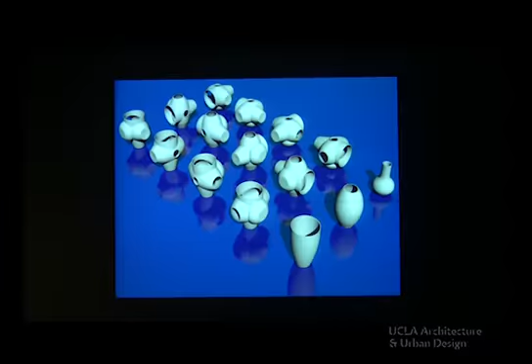The first project I'll show is a vase we designed. We took three archetypes of vases where you can put different bouquets in, and we merged them together, with this as a result. So it's one object made from three very cheap vases—you can buy them for $5 at the department store, and when you merge them together, they actually get ten times more expensive. They're very difficult to make, but very beautiful, we think.

I'll show a lot of projects at a very high pace—if you don't understand something, feel free to interrupt me. Also, I speak a little funny English sometimes, because we speak English in the office, but with all mainland European people, so non-native speakers, and sometimes we make up words that don't exist but we all understand. So if I use one of those words, just ask me and I'll try to explain.

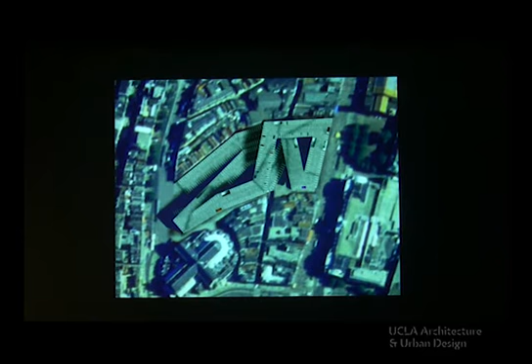This is an interesting project—the final project of Pieter and Kamiel at university. It's a shopping mall and office building where you can drive and park on top, and this is in the middle of the center of Amsterdam.

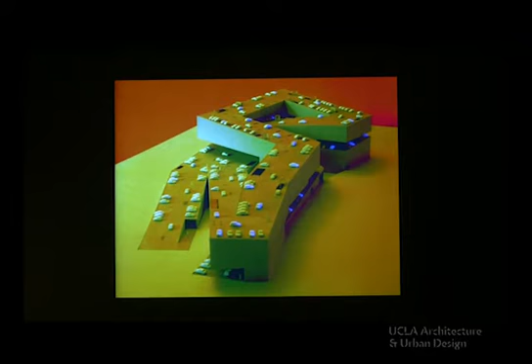So it's a very interesting sculpture. It's sort of a 1 kilometer long stripe that is folded up in the city center of Amsterdam.

Later in our career, we got the assignment to make 501 family houses in a new area close to Utrecht, and we tried to use this idea again of driving and parking on top of the house. A typical extension in Holland for family housing is completely based on the car: you have a little street, you park on each side, a little front garden, then row housing, and in the back a private garden.

We were basically asked to make this typology. We thought, you see the children are playing in the street and there's practically no room for them, so we thought with the same density we could make a much better plan.

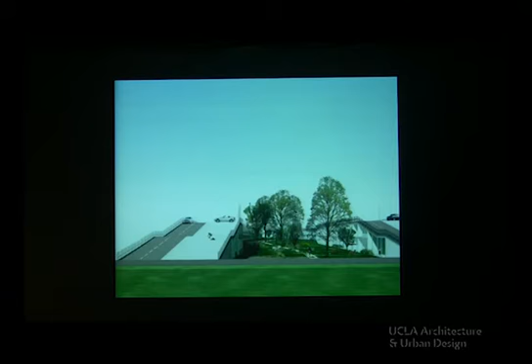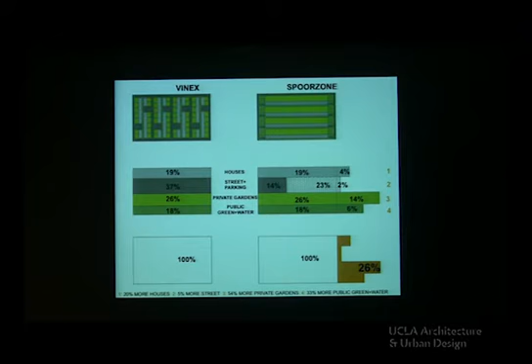So we said, why not park on top of the roof? You can still park on top of your own house, but you create a completely car-free environment to live and play. We made calculations with the clients: left is the regular plan, right is our plan. We create 4% more houses to pay for the additional cost of parking on top, and we still save 26% of space that can be completely green, making green row housing with private gardens and parks between the houses.

It was almost executed because it was completely viable, but then the housing crisis in Holland came and the client didn't dare to build it anymore. We were hoping that the kids from these houses, when asked in kindergarten to draw their house, would finally draw something other than the typical house.

One of our most important projects is the Groninger Forum. It's a museum, library, conference room, restaurant, bar—actually what we call the living room of the city of Groningen. Groningen is all the way in the north of Holland, one of the most important cities of the northern part of the Netherlands.

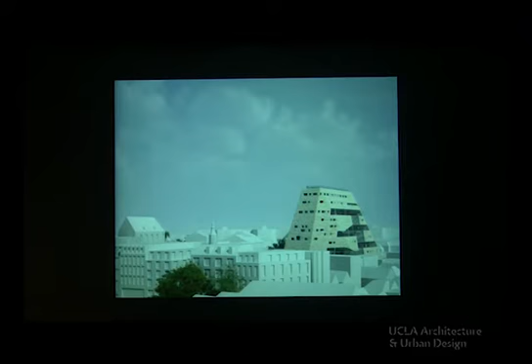It's in the historical center of Groningen, right on the Grote Markt, and it's much higher than most buildings around it. To indicate the importance of the location, the Grote Markt is actually on the Dutch Monopoly map, so that means it's an important location.

This is the model we built. I just mentioned it to Neil and Mary—the general public got to vote which of the proposals could win, and we were given a wooden model by the city in which we could implement our design. As the only competitors, we built our model in wood too, to make it fit into the surroundings, while all other architects came up with a white model.

There's Erik van Egeraat and Wiel Arets, quite famous Dutch architects, our competitors. Zaha Hadid was also competing. So we beat them all—I'm still happy about that, by the way.

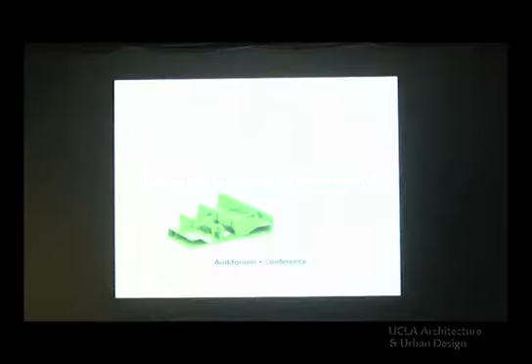The core of the building's program is a library, with a lot of art film houses, a museum, and a conference center around it. We thought the whole building should be like a physical Wikipedia. This is all the programs that are around the atrium.

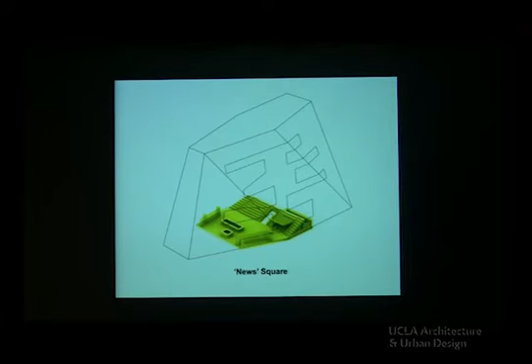This is the auditorium, we have a museum, we have a cinema, and then there's a square on the ground floor. The open spaces are all library basically, but they're all called squares with a certain theme: the culture and youth square, the history square, the cinema square—all squares together make up the whole library, connecting all the other programs.

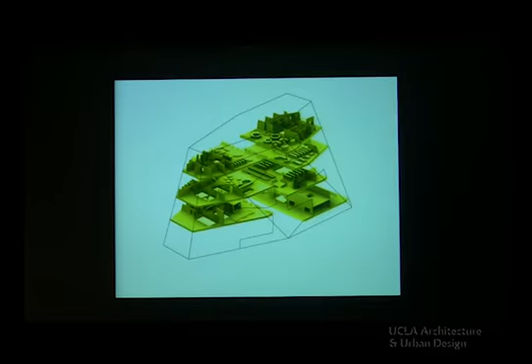This is the model that we built at the time. It looks extremely complex if you take off the facade, but the geometry is quite complex while the building itself is actually quite simple.

So the atrium, we were asked to make a program that would connect all the different programs of the building, but there was very little space on the site, so we had to invent a new way to connect those things that you would normally do on a flat surface. We made the atrium, and we actually made this atrium the image of the building, connecting part of the space that would connect all the programs.

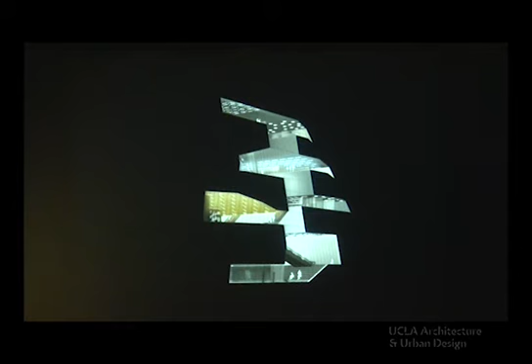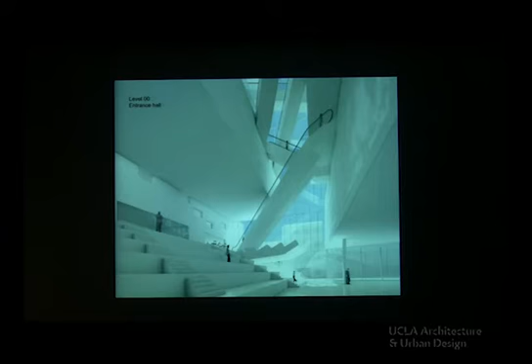At night the atrium would serve as a logo for the building. Here you see this atrium. So all these open spaces are library, so everybody can walk in without a ticket and enjoy this space. And then from there you go to the cinema or to the museum, which is actually ticketed.

Here we won the competition, so we could keep everything white again. So this is the plot. This is the maximum extruded plot, the maximum envelope.

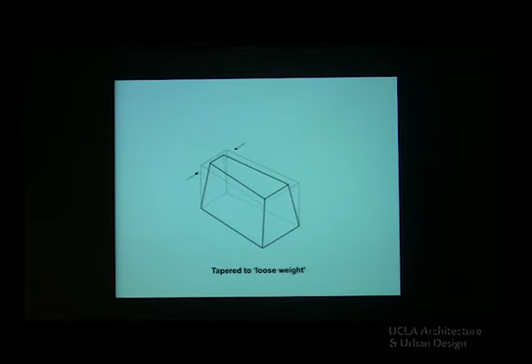We taper it to the top to bring light to the surroundings, and we slice off some parts to create entrances. We slice off some more to bring even more light in. We did some sun studies, and there are small houses all around it, so we didn't want to put them in shadow. And then you come up with this building.

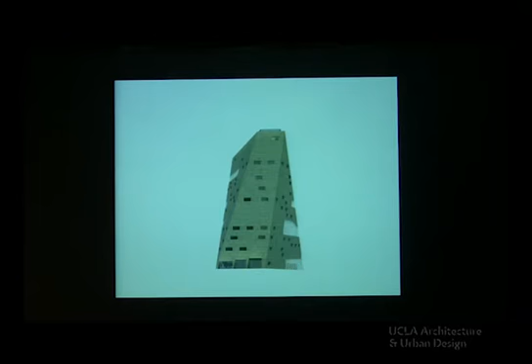And actually, from every side, the building looks completely different. So it can look like a very huge building, or it can look like a small, very slender tower, depending on where you see it.

And of course, we had to make calculations to fit in the rules. The maximum height of the building was 45 meters, and the average height, per the zoning law, had to be 33 meters. Our building's total height is completely 45 meters, the maximum height. But we cut off pieces from the original extrusion, calculated them, and found that the average height was actually 31.4 meters. Well, we got away with it.

This is how you see it later from the photomontage. Last week the contractor was chosen, so in the next couple of months we're going to start building, and the building is going to be finished in 2017.

But what didn't show in the presentation is that it has a very big basement with a parking lot going down 20 meters, which is a big job in Holland because there's water everywhere. So that alone, the basement, is going to take 2 years to build.

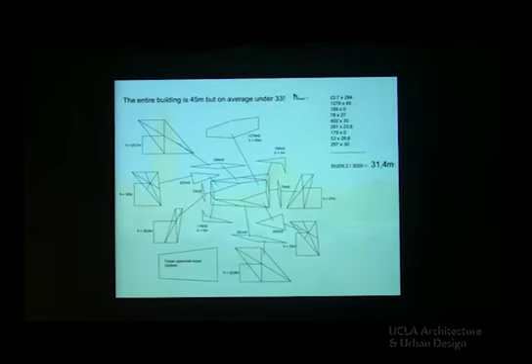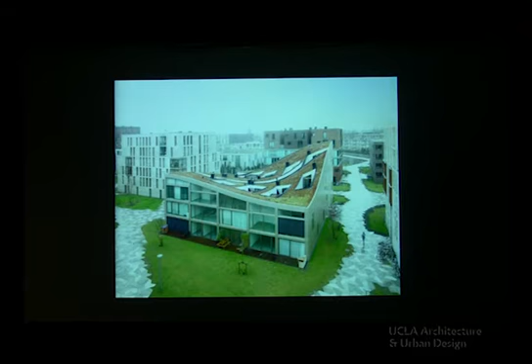So the next project is Funen. That's the rewarded housing block we did in Amsterdam. We designed it in 1999. It was one of our first housing projects, and it got executed in 2010, a year ago now. And this is the end result. Location is in Amsterdam.

This is the old harbor that is completely converted into a housing area, a little industrial zone now turned into housing. Right here is the location of the building. There's a master plan by Architecten Cie., who makes what they call the hidden lights, little villas in green with a big wall around them to block the noise of the trains around it.

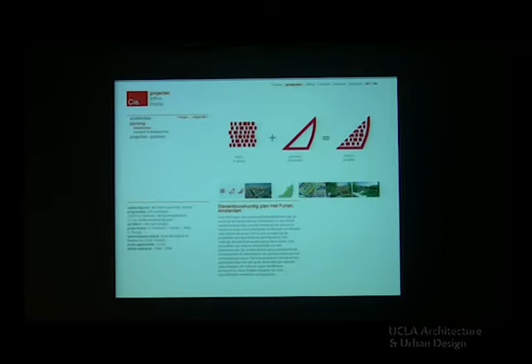The given brief was that we had to make 10 dwellings with this profile, so 2.5 stories, or 2 stories plus a half story, and make a roof terrace. We cut them up into 10, but we said that's not such an exciting volume, so we made 2.5 floors completely flat, and then started moving it around.

So we chop it up into 10, and we actually push the roof down where the next-door blocks are close, and pull up the roof where there's space in the urban plan, because it's quite a narrow and dense urban plan.

And we have this inner street where the houses have their entrances. We switched it from an open space to another open space. So all houses have exactly the same volume, but they all have completely different bay widths and different floor plans.

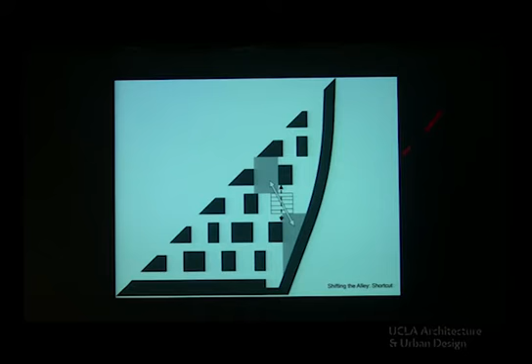And it is the end result of the inner model. You see here that the inner street is connecting 2 open spaces, and the shape of the roof is bringing light into the urban plan.

We found out later that making 10 different floor plans in a little block is very labor intensive, especially because halfway through all the building code changed, so we had to redo the whole thing again. But they were quite exciting houses. They were actually built during the crisis, but still all sold because they're quite unique housing.

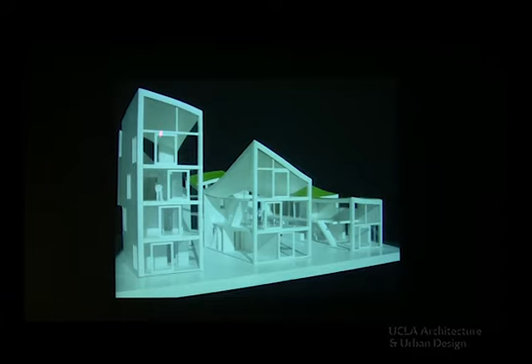Here you have the model. This is one house, this one missing, and another house to show you. So there are different floor plans, and they all have a patio in the roof.

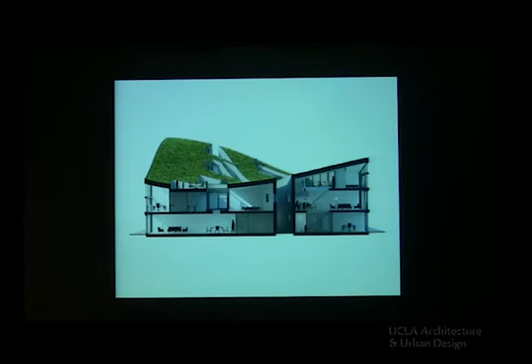We slice it up, so here you see this patio bringing light into the deeper houses, in deep dwellings. So the change from very deep and low into very high and narrow. Here you see a picture of the inner street connecting 2 open spaces. This is one of the patios.

This is our office visiting the building when it was finished. Luckily, it has a very poor interior when we delivered it, but all people hired an interior architect to make very beautiful interiors. It's just the standard of the way we finish housing in Holland. It's very poor as a standard, and everybody is making their own nice house out of it later.

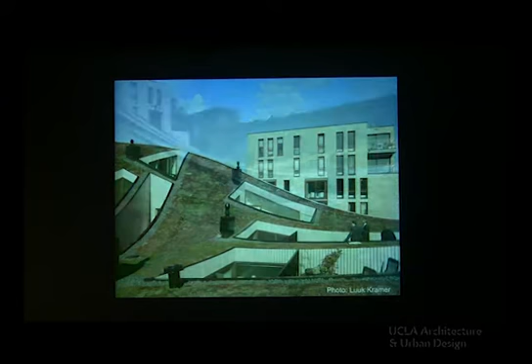Here you see the patio in the middle of the living room. And the roof, which is quite unique in Holland because everything is flat, and this almost feels like you're in a little mountain area when you're in the patio on the roof. Happy owner. The roof is getting more and more green, and sometimes very white.

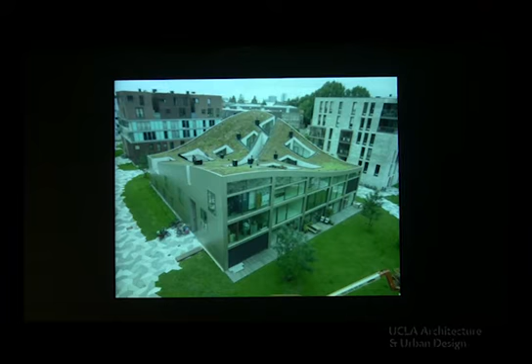This is actually a very unique area because it's completely car free. So you park under the big building next door, and then you walk to your house. You see everybody has a bike. And the children just run outside without being afraid of cars. It's a very nice living environment. Apart from the building, that's a very important quality of living here.

Next project is social housing in Groningen. This is the project, another competition that we won. It's senior citizen housing with kindergarten downstairs. So we stack up different housing types, and we use the balconies to sort of smooth out the volume, because it's built in a very cheap way.

This is the area where it's in. This is considered a very unpopular kind of housing typology. This is the gallery flat, and in a way we do the same, except it's not a gallery but a balcony. But we try to show that this rigidness of the gallery, when you adjust it a little bit, could actually be a very attractive type.

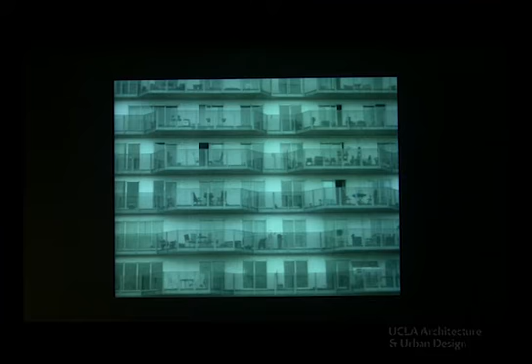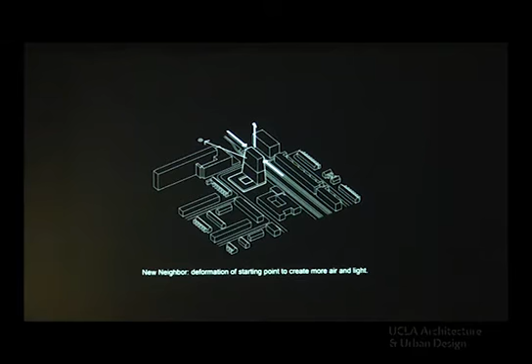So this is the original volume given by the urbanist. It's really not working. So we actually changed the basic volume. We made it more slender and made the extension lower, and again tapered it to the top to bring in light for the surroundings. You see there are very small houses next to it, very small one-family houses, so we didn't want to obstruct the light coming down.

So this is actually very luxurious social housing, for older people that have like a big 3-room apartment. It's also especially catered to disabled people. So everybody has a big balcony and a sort of smaller balcony just for the window washing. But it's wrapped all around.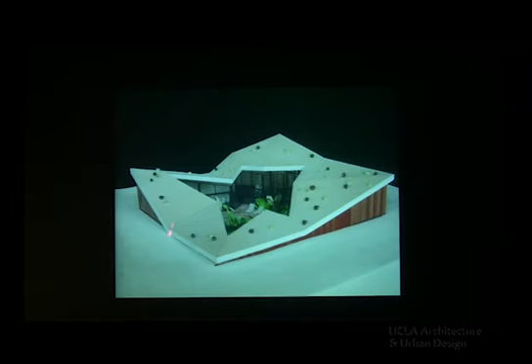So we wanted to create this patio house, but here we were not allowed to build, so we thought we'd just push the house underground there. This is what would have been the shed, so we were allowed to build 10% outside the pitch, and this is just where it's allowed to build. So in the end this is the shape - this part is considered underground, this is underground, and this is the 10%.

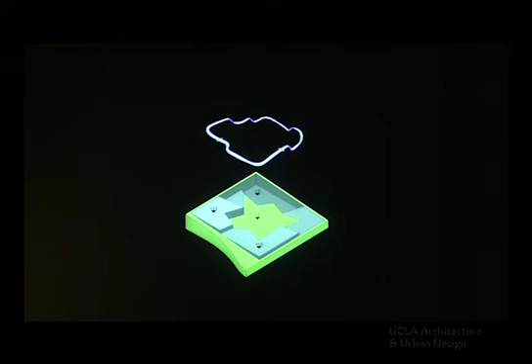So actually, forced by this zoning, we created a very interesting patio type that is not a flat patio, but one that is changing levels, which has the big advantage that there's a patio, but you still have a view over your own house looking outside to the mountains.

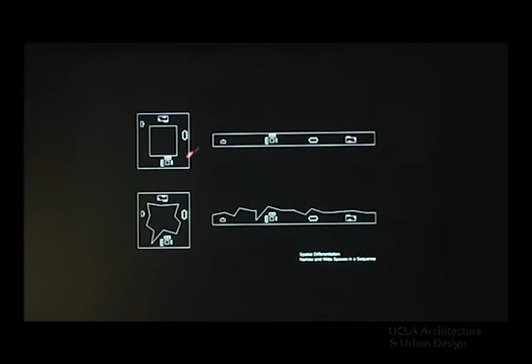These are the floor plans. You see the shape is not straight, so you start with this patio, but then you find out that different functions, like the living room, are bigger in size than the bathroom and the kitchen and the bedrooms, so the size of the patio actually follows the function that is behind it.

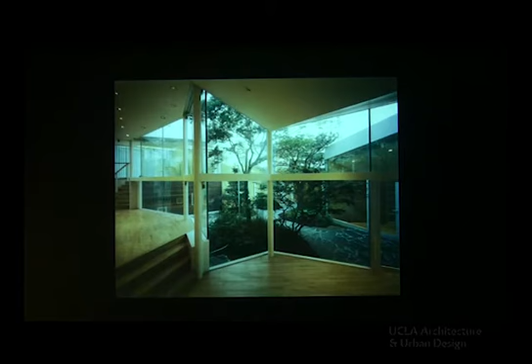This is the view from the front door, and this is the patio, glass inside. So you see the different levels. And here you get to the living room that is actually looking out over the roof in the back.

It's the front door we designed, but we sent them a computer file for them to automatically produce this. But in the end, there was one guy with a drill who looked at the drawing very closely and made all the holes.

That was 5 years ago. Very pleasant place to live, especially in the season where these pictures were taken.

Then we have something completely different: this is a competition for a bridge, a crossing facility from Hong Kong to mainland China. My wife is from Hong Kong, so I always like to build something there, and that's why we keep doing competitions there. But we always sort of play around with the competition rules, and that's probably why we never win.

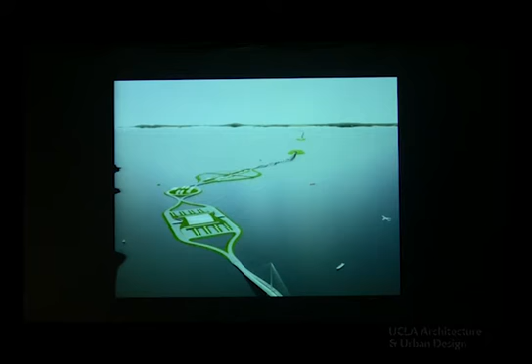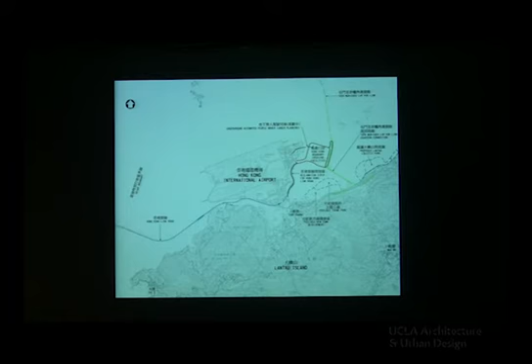So this is the final result. This is the location - the International Airport of Hong Kong, where they make a crossing for cars and buses to go to with a new bridge, the longest bridge in the world I believe, going to China. The competition was to make a nice roof over these facilities, because the layout of the facilities is so complex that the only thing an architect could do is try to make a roof on top of this floor plan.

One of the complexities is that you also change from left-hand traffic in Hong Kong to right-hand traffic in China, so that gives a lot of extra streets to organize. We thought it could be done differently and maybe more efficiently.

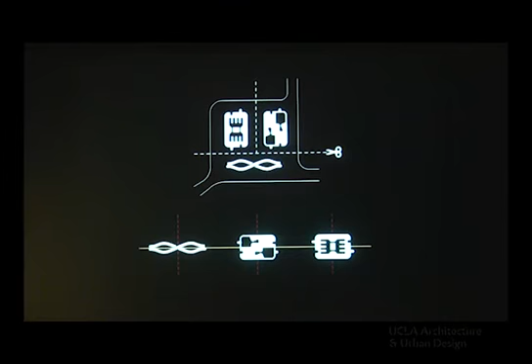So we analyzed the program. You have the cars, you have the buses, and you need to change from left to right driving. And we thought we'd just separate them into different islands. So we have one island for cars, one for buses, and one checkpoint. And we thought we should celebrate the moment of changing from left to right driving.

So we designed a special bridge where you actually start on the left side and end up on the right side, and hopefully somewhere in the middle you're aware that you changed lane. Normally there's only a little sign with a funny cross on it indicating that from then on you have to drive on the other side of the street. At least this is a bit more like a celebration.

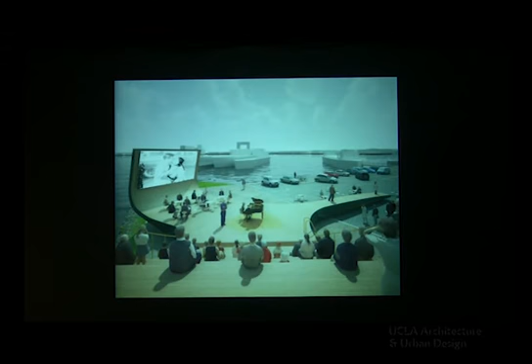This is another small project. We do very big projects too, and I'll show you a much bigger one later, but we love doing small projects because they're much faster and often less hassle, more fun.

This is a little installation for the harbor of Amsterdam. The Amsterdam harbor is not so successful because the Rotterdam harbor is very successful. That's why Amsterdam harbor is not so successful. They're trying to turn the harbor area into more of a creative industry and housing area, and since it's sort of a no-go zone, they want to build this installation to organize festivals, fashion shows, theater, and films.

So this is the location. Here you can see it because this one's not done yet. Right there is the location. It's really in the middle of the water, actually a beautiful view, with a lot of big boats going around.

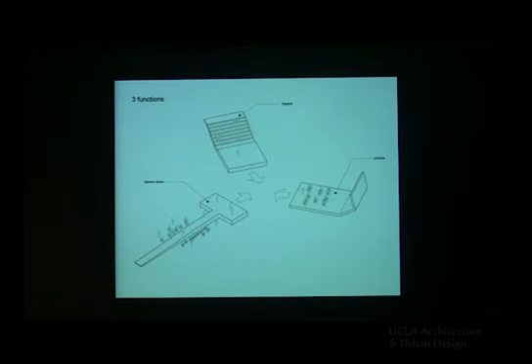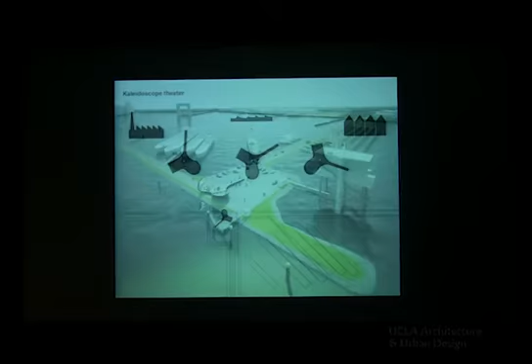So they want three programs, maybe something with theater and film. There's a lot of fashion industry already settled in the harbor area, so they want a catwalk for fashion shows. We combined them all together. But since every function is different, we thought it would be nice if it could actually turn, so it could always be in the most perfect position, with different views each time. It's somewhere in between a boat and a harbor crane.

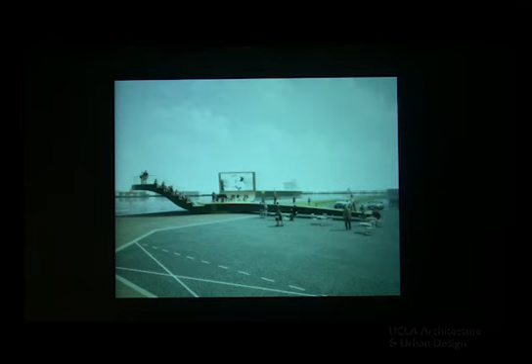And it can be turned. So we built it soon, and it appears to be very complicated. If you make the shape and just fix it, it's very simple, but as soon as you want to make it turn, all the normal contractors start to panic a little bit. But really nice.

It's actually almost like a crane platform, a big circle with very heavy wheels, all steel in this case. They have these little electric cars that have to pull it around. It's very low-tech in the way we made it. We thought it would be nice if it turned during a show, but there are a lot of rules and regulations that don't allow that. Maybe if you put it in Disneyland, it could work.

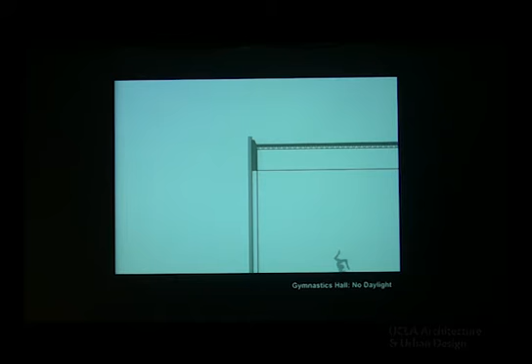And there's another project, the gym hall in Utrecht—a sports hall completely dedicated to gymnastics. The problem with most sports hall facilities is that they're very cheap and boring boxes without any expression or light. We really wanted to bring light into the sports hall, but when you do gymnastics and complicated saltos and other moves, the lighting can't change a lot.

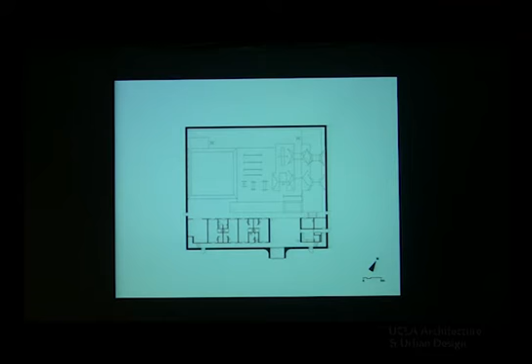So we had to come up with an idea for indirect, dim light coming in. What we did is pull the normal facade out a little bit so the light would come in via the roof. So this is the volume, and we pull out the facade a little so the light can come in. It's funny because that's really the basic and only idea behind this building—a very simple building with a big floor for gymnastics, some changing rooms, and a little stand on top of the changing rooms for the public.

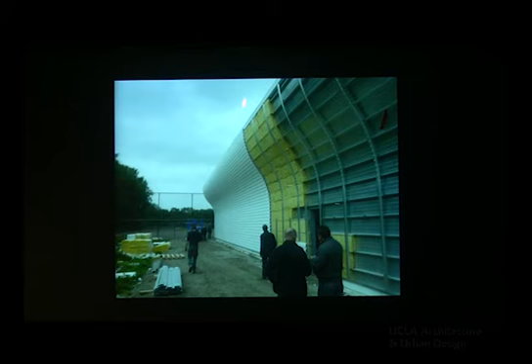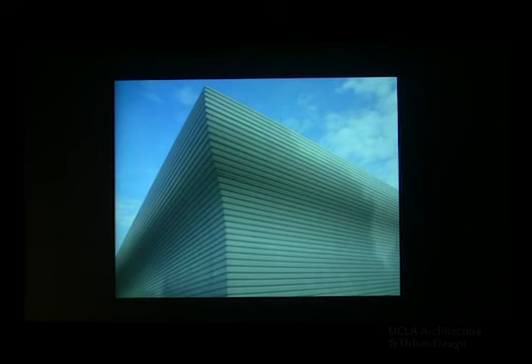This is how it's built. As you can see, it's just a standard steel shed. Only the corners are a little bit more complicated. But still, with the basic material, that's very cheap, it still makes it very nice. This is the entrance.

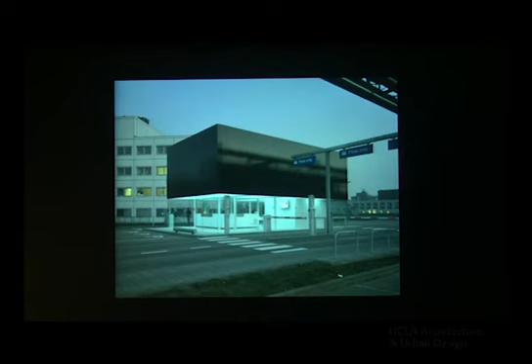Another small project that we did is the entrance building for an industrial area. On top there's a lot of computers that regulate the safety in this area, so they have to be maintained. So this is an alteration of an existing building.

And we are always very interested by reflection. In some early works we always try to make this kind of facades for buildings, and we finally had the chance to use something like that. So this is the existing building with computers and machines up there, and basically this is the location. This is the kind of work being done there, so the guy checking the safety of the area.

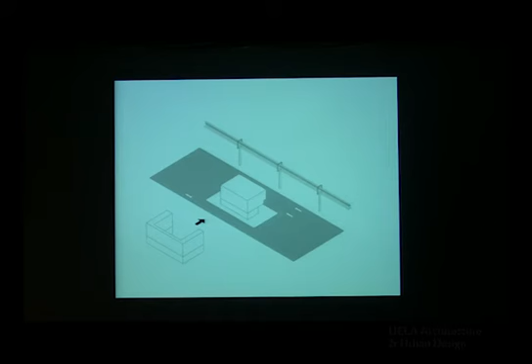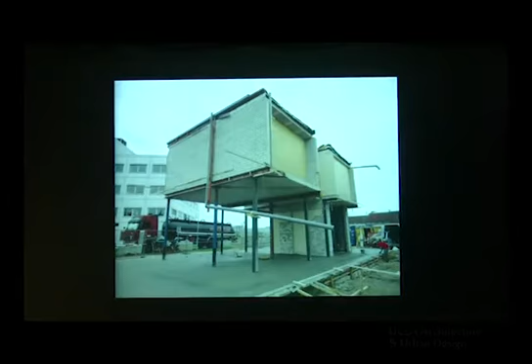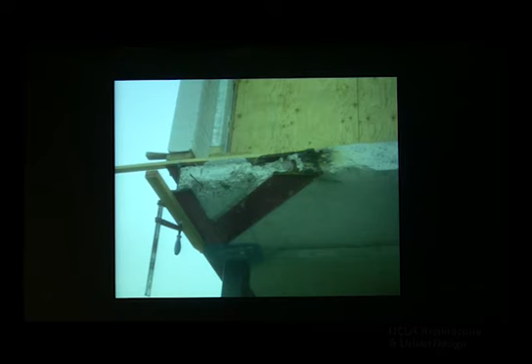So this is what was left of the building. We just made it stand up still. It's really completely chopped off the way we wanted it, and now we put the new box around it.

These are very small projects and they're nice and fast. They can be created from start to finish in about half a year or so, which is fast in architecture, and still have a nice result. Hitoshi, our project leader, very proud, showing the different phases of the building. You can also see the project text on it.

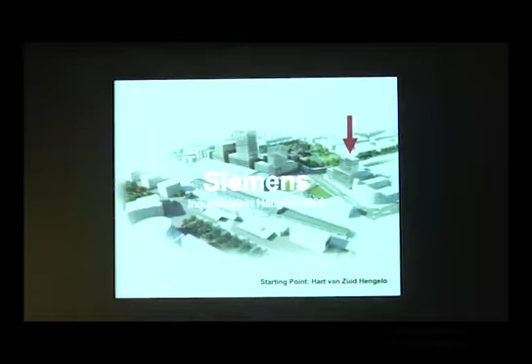Next project is an office building in Hengelo. Hengelo is in the east of the Netherlands, famous for industries that are there. Siemens has big factories there to make big machines, not consumer goods, but oil platform machinery and stuff like that.

And they're trying to make a completely new city there. This is the central station, this is the center of Hengelo, and right on the other side of the central station there is this big industrial area that is actually only big sheds. Now they try to turn it into something a little more attractive. They want to make a World Trade Center here, which I think is a little bit vain for Hengelo to think that they could have a World Trade Center. They're still trying. But Siemens would have their European or Dutch headquarters here of the machinery shops.

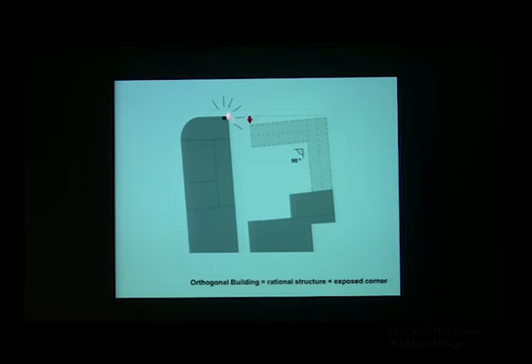So this is the floor plan. The only addition that we did is to turn it, because this is actually quite a nice industrial building, and we will show a little bit more of this building.

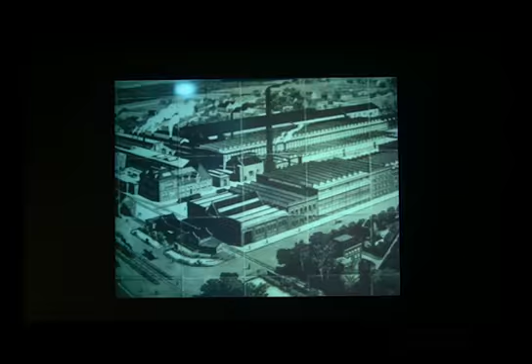So we took these sheds as our inspiration, and you see it's really very typical for this area. We thought if you want to represent this area towards the city when you come out of the central station, how could you do that? Maybe we should just put it up so you can actually see the shed roofs and turn it into a facade. That's basically what we did.

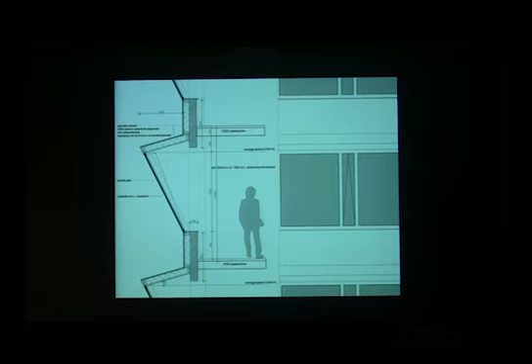So there's another advantage to making the facade slanted: it actually gives you a great view. All the buildings that need a good view looking down have this tilted glass facade. Even here on Shopping Street, people like to look down, so they make the window in a way that you can look down easily.

Next project is Kameleon. It's a very big project, actually one of the more commercial projects we do. It's in the Bijlmermeer, a post-war area where they built very big flats that soon turned into a kind of ghetto. So they're breaking most of those flats down, although they're quite beautiful with a very interesting ideology behind them. They want to break it down, and most are replaced by low-rise, one-family houses again.

But in some areas the urban designers still wanted some serious big blocks. This is one of them, and we designed it. It's the local shopping center of about 15,000 square meters with parking on top, and then apartments on top of that. They were designed to be buying apartments, but by mid-2008 the crisis was so strong that they turned into social housing. The client is a housing company, so they do both social housing and commercial housing.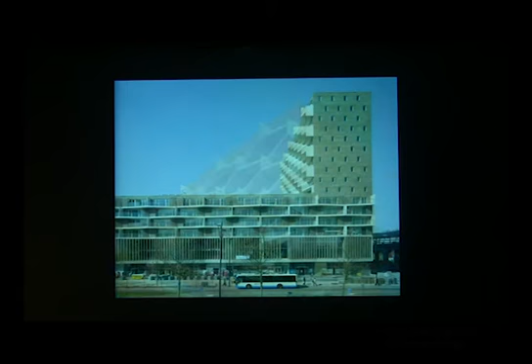This is the model we built. On one side it's a long wall, and on the other side we cut it up because there's a green yard, and this is where the sun is coming from. So to give light to the inner court, we break up the block.

This is the shopping area, and there's parking on top, which on the edge also has supermarkets at the parking level. Then we built this garden on top of the parking - it even has a water stream in it to make the houses attractive. You should mention that this area isn't very popular to live in yet, so you really have to bring in some quality to make people want to live here.

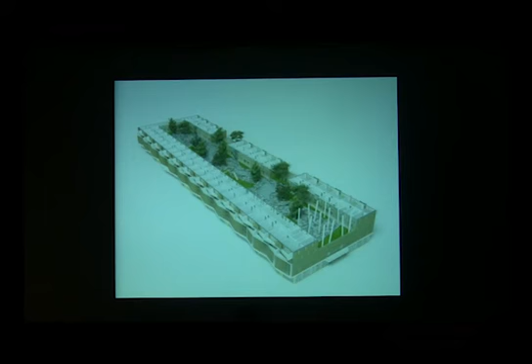So it's all simple 90 square meter apartments, about 900 square feet, basically all the same. Then the tower has some different, more luxurious typologies. You see the entry - the waterway is already there, and this will all be green with trees. You see smaller galleries broken down with some stairs to really make people feel they can access this mutual garden very easily.

Okay, this is our very first building. This is WOS 8, it's a heat transfer station. So heat from the local power plant is brought here to turn it into hot water for about 20,000 dwellings in the surrounding area. We were only asked to design a box around this machine - it's a very expensive machine with a lot of infrastructure, so we could just make a nice box going around it.

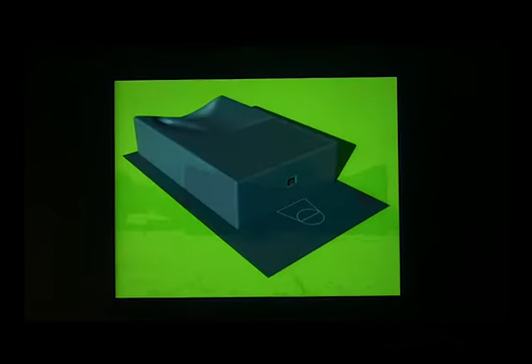We were only asked to design the skin, which we took kind of literally, because we have a completely seamless building with a polyurethane skin that is sprayed on site. There's no traditional building detail in there to keep the water out. We were only allowed to make one window.

We thought, well, then we make one window that you actually have to throw a ball against, because later it's going to be in the middle of a residential area, and these kind of buildings are always being vandalized by kids from the neighborhood. So we try to make it more attractive.

So we made this climbing wall, and actually this climbing wall spells a text in Braille. We never tell what text it is, so you have to find out yourself. Actually, the neighbor next door was making a competition, but she could not find too many blind people that could climb well enough to read the text.

It's going very fast, this is the short version of all these projects. Basketbar is one of our most famous projects, actually. It's the second project we did. It's in the Uithof, which is the University of Utrecht campus.

The urban plan is by Rem Koolhaas, and we were asked to build a bar, because for the first time there were all kinds of laboratories in the neighborhood that made it impossible to live there, but they removed the laboratories. So then there was student housing coming, and of course students need a bar, and we were asked to design it. And we were asked to design a two-story building in front of this bookshop.

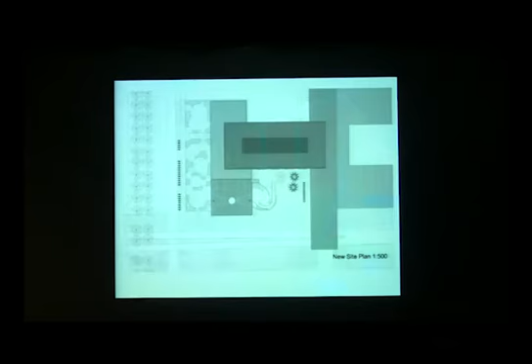Another building is Sportgebouw, and I showed some themes but did not elaborate much. But all these buildings and designs have in common that we add something to the asked program. So we always, when we get an assignment, look at the program and see what is it that we can add to the actual brief, to make it more interesting, or to make this building communicate more with its surroundings.

So in the case of the Basketbar project, we added this basketball field on top that was not part of the brief. And in the Sportgebouw it's something else.

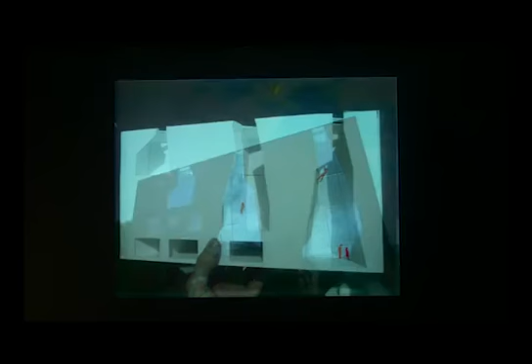What we did here is, it's a big sports hall in the back, which would be a very boring facade. And we suggested adding a climbing center, so you can climb inside here. It's a very popular sport in Holland, to make the building more attractive, and also this will light up at night. You see people climbing all the way up there. So we added program to make the building more interesting and to make it interact more with its surroundings.

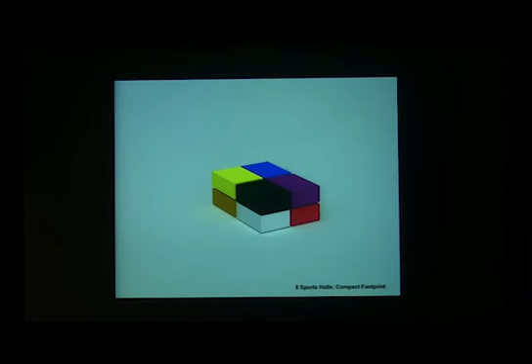So this is actually the given brief, we have to make 8 sports halls. And we stack them up, just a simple box, and we put the climbing wall in front of it.

This is how we expected it to look, and this is how it came out. This is what we showed the client, how it's going to look. You see here that this is just a very anonymous box. We tried to make only the inside as attractive as possible.

These are the changing rooms and levels, and this is the climbing center.

We even designed, since there are 8 halls stacked on top of each other used by different schools, so before every school would have its own little gym, and now they have a whole area with schools, and they make one very big gym, actually, to have better facilities for the kids.

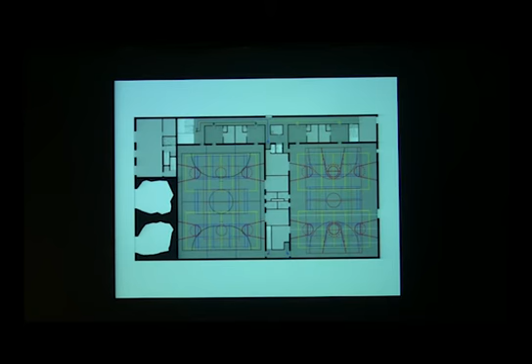But it's still a little bit complicated to find the room where you have to go for certain classes. So we designed a wayfinding system based on Olympic colors, of course, so you can just follow the red line to go to the location where you have your gym class.

This is how it's being used every day. Basically, you see that the Dutch kids, when they do sports, they sort of play and they just do games. They can wear whatever they want.

So this is the image we made, and this is now how it looks. It's not completely finished yet, that's why we cannot have a picture in use with people hanging up here. It would be more spectacular to look at.

On the other side of this sports hall, there's a little building again that they asked us to do, which is like the information center of this school area. We designed a little stand where you can also do skating, so it's an elevated skating bowl with the information center underneath. You can sit down in the building.

Across has a big video screen. You can watch information and movies there. This is a simple building.

In similar fashion, we were asked to make a bike pavilion in China. Biking is getting very popular again in China as a sort of leisure sport. So this is in the new housing area, a bike pavilion where you can rent a bike and have a drink.

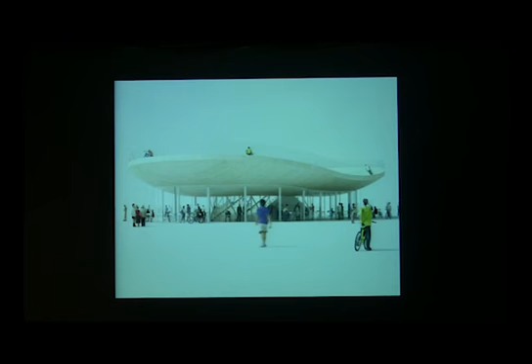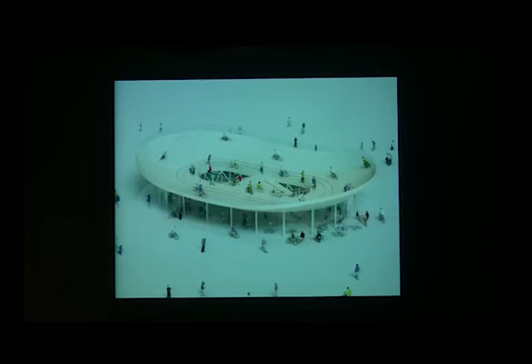We thought that on top of the bike pavilion, we can have a sort of cycling arena as a roof, to enhance this idea of the function, to communicate the function of the bike pavilion. We also designed those kind of blocks - that's sort of a new hobby of ours, doing this kind of big projects in China.

Something completely different is the flower power. A couple of years ago, we were asked by the Dutch government to look into windmills for creating power. There's a target of the government that they will have 20% of energy created by wind by 2020, but nobody wants to have a windmill in his backyard because they think it's ugly and makes a lot of noise.

So there are several designers asked to make a proposal that would make people accept windmills. We just made them very simple in a way, very romantic again, so maybe people will start to appreciate how it looks.

This is one of the versions. Actually, they're not as big as normal windmills, but they can be used much closer to houses. So we have different types. We publish this on the internet, and people call us all the time if they can buy one, but it's not a product yet - it's a standard product, so it's actually quite easy to make.

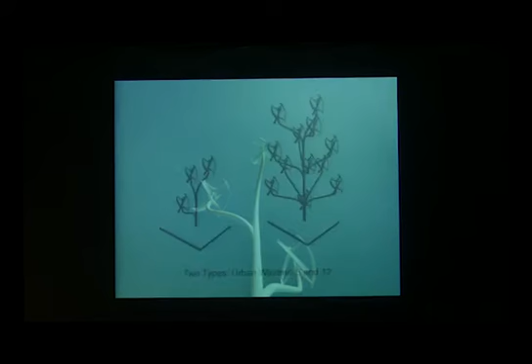But the result of these windmills is quite small, so you will never make back the money that you spend for it - it's more like symbolic. We're trying to make a prototype anyway at the moment. At least our model prototype works, just with a little bit of wind.

And from this, we thought we can also do this on a larger scale. So this is a competition for Taiwan Tower, close to Taipei. We can make a crossover between the Eiffel Tower, because they want an icon, and a windmill, to make a power tower. So it's a steel structure completely filled with those wind wheels, and it will generate energy.

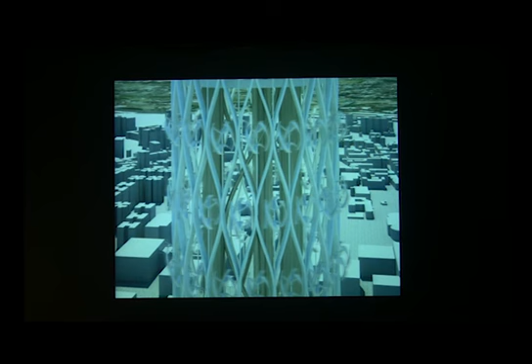Well, this actually could work and generate a lot of energy, at least enough energy for the use of the building itself. And at the top there's the information center for the building department of Taipei. And that's it.

Any questions? Yeah. Any questions? All going very fast, I don't know.

Well, it's a really nice presentation, and I was curious when you talked about your residential projects, you explicitly talked about the division between traffic and the residential and the environment. But at the same time, I'm getting the impression that you use traffic as a generative material in your practice. So I'm kind of curious about how you think about the relationship between architecture and traffic.

How we feel about it, and the projects we show with parking on the roofs, actually make cars more visible. It's a strong reaction to the movement you had in the 80s and 90s, where urban planners and architects denied the existence of the car. People, especially left-wing city governments, tried to push the car out of urban areas. You cannot go inside anymore, you cannot park anymore, you should take public transport, which is very limited. Yet if you look at the housing areas being planned, they're actually completely catered to the car. Everybody wants to park in front of their own door, and everybody has a car to go to work.